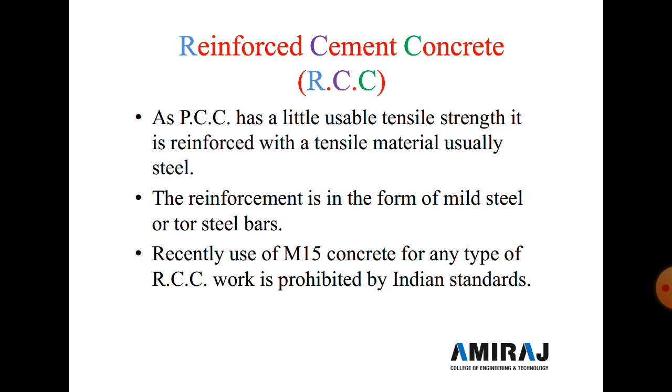Now next we discuss quality control of the concrete. Quality control of the concrete can be considered in three stages. The first stage is quality control before construction, the second stage is quality control during construction, and the third stage is quality control after construction.

So what is quality control before construction? As the name indicates, before construction. This includes quality control over the raw material, over the process and method of preparing the fresh concrete, and transportation of concrete. So here we include the raw material quality before construction. Depending on whether the raw material quality is higher or lower, we prepare the concrete. If the quality of the raw material is higher, at the end the final product concrete is a higher quality concrete.

Now next is quality control during construction. This includes quality control during placing the concrete in the formwork, compacting the concrete and curing of the concrete. So during construction, three stages are there: placing the concrete, compacting the concrete and curing the concrete. If we take care during these three processes, we control the quality of the construction or the quality of the concrete.

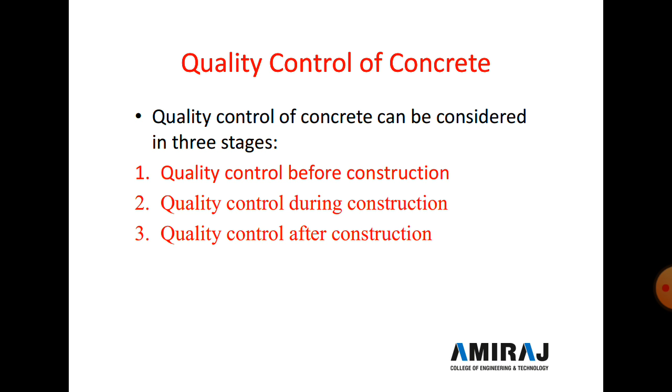Now the next topic is cast in situ concrete. The construction in which concrete is poured in the permanent location of any building structure is called cast in situ construction. As the name indicates, cast in situ construction means your concrete work is done on site, on the construction site. This is the opposite of precast concrete work. In precast, we construct building components in a factory, then transport the precast components from the factory to the site, and we fix the building components. All the components are precast or prefabricated. The opposite is cast in situ construction.

Concrete is made on site, then we pour the concrete in a formwork, then compact the concrete, and then cure the concrete on site. So no transportation work is included in cast in situ construction work. The concreting of any permanent location of an RCC structure is generally done as cast in situ work.

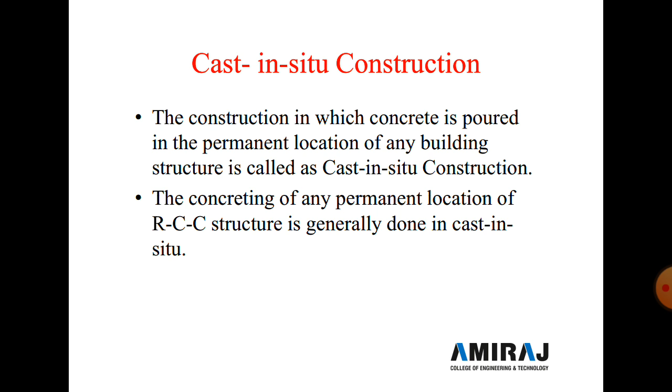Now here the construction procedure of cast in situ construction is given. First is procurement of the ingredients of concrete. The ingredients of concrete to procure are cement, sand and aggregate, and steel bars.

So as per the design, different diameters of bar are used as per the structural design, and then all the material is stored and handled in different locations. Like cement is stored in a moisture-free area. Now next is batching of the ingredients of concrete.

So here there are two types of batching, weight batching and volume batching. If we take a proportion like 1:2:4, here 1 means one part of the cement. If we take batching by volume, one volume of cement, two volumes of sand and four volumes of aggregate. If we take batching by weight, 1 kg of cement, 2 kg of sand and 4 kg of aggregate.

Now all the materials are mixed in a proper way. If the construction building component is small, we use hand mixing. And if a large area of concrete work is done, machine mixing is required. So mixing of the concrete is done. Then after mixing, all the concrete is poured in the formwork. So here placing of the concrete in the formwork is required.

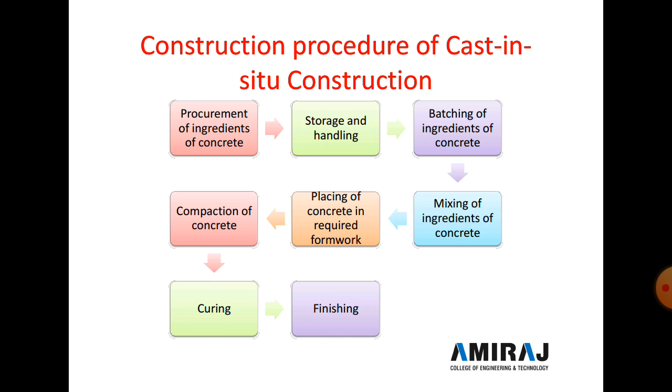Now next is the various operations and equipment for cast in situ construction. There are 8 main operations given. First is batching, second is different types of mixers, third is formwork, fourth is transportation, placing, compaction and finishing of the concrete, fifth is compaction of the concrete, sixth is vibro pressing, seventh is finishing, and eighth and last is curing of the concrete.

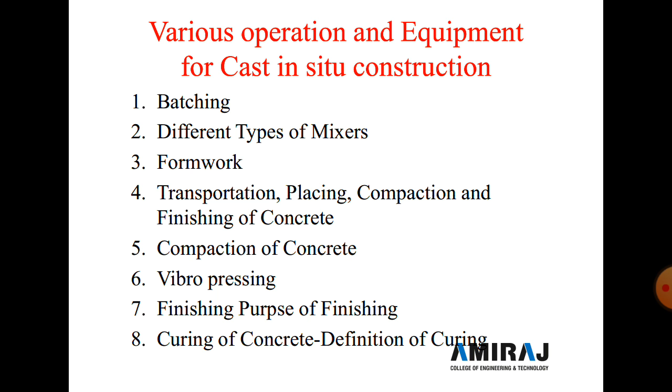So these are the different operations and equipment for cast in situ construction. Now we discuss them one by one. First we take up batching. Batching is nothing but mixing cement, sand and aggregate as per the ratio. As per the ratio or grade, we mix the material by volume or by weight. So batching is divided into two parts, volume batching and weight batching.

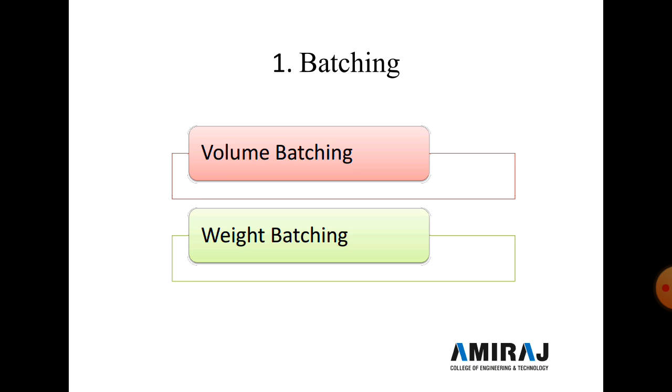So what is weight batching and what is volume batching? Volume batching is not a very accurate method, but because of its convenience on site, it is widely practiced, and on a particular site the volume measuring containers can be calibrated according to weight.

On site, in volume batching, wooden boxes with bamboo handles are generally used, and we also use hand carts in large construction sites. All the boxes are the same size. Raw material arrives on site, we estimate how much weight of sand, cement and coarse aggregate fills the box, and then according to the mix design the number of boxes per batch can be determined.

The box capacities are differently available, like 20, 25, 30, 35, 40, 45 and 50 liters on site. So flexibility can be achieved when mixing different grades and in case the mix design changes. The boxes are called farmas on site. If we take a proportion like 1:2:4, one box of cement, 2 boxes of sand and 4 boxes of aggregate. So here the wooden box is used as a volume measure.

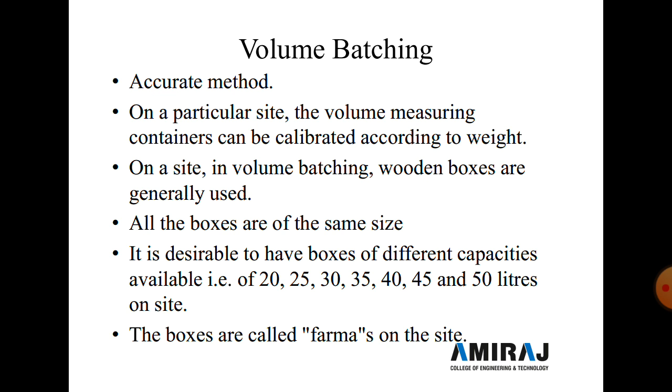Now next type of batching is weight batching. This is an accurate method of batching, but on site it is rarely used or adopted.

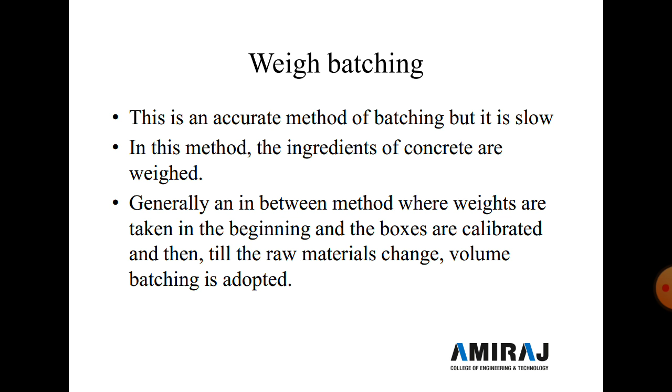Now in this method, ingredients of the concrete are weighed according to the required grade before mixing them. Generally, in between methods, the weights are taken in the beginning and the boxes are calibrated, and then volume batching is adopted till the raw material changes. On arrival of a new material, the boxes should be recalibrated.

So weight batching is used in a modern concrete batch mixer plant, that is, an RMC plant. Generally in an RMC plant we use weight batching. Modern batching plants are very sophisticated, having computerized control batching which measures the ingredients, detects and applies correction for surface moisture and bulkage completely automatically.

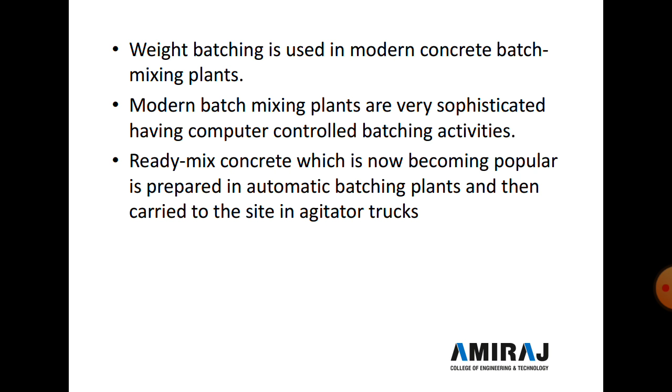And ready mix concrete has now become popular; it is prepared in an automatic batching plant and then carried out to the site in a truck. In an RMC plant different materials are used and also admixture is used. All the materials are mixed as a weight batch.

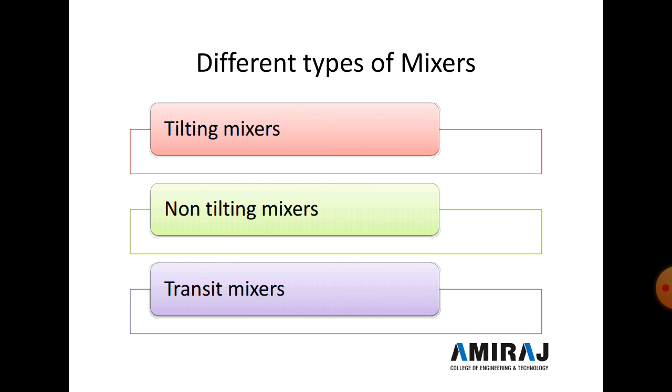Now, different types of mixers are used in construction. Three types of mixers are generally used to mix the materials of concrete: cement, sand and aggregate, and if required we add an admixture. The first is a tilting mixer, the second is a non-tilting mixer, and the third one is a transit mixer. So what is a tilting mixer?

Now the hopper is lowered, water is added to the drum, and the concrete mixture is rotated for 3 to 5 minutes. After this time the drum is tilted to the opposite side for emptying. All the materials mixed for 5 minutes are removed from the drum onto a metal sheet, from where it is carried for pouring into the formwork.

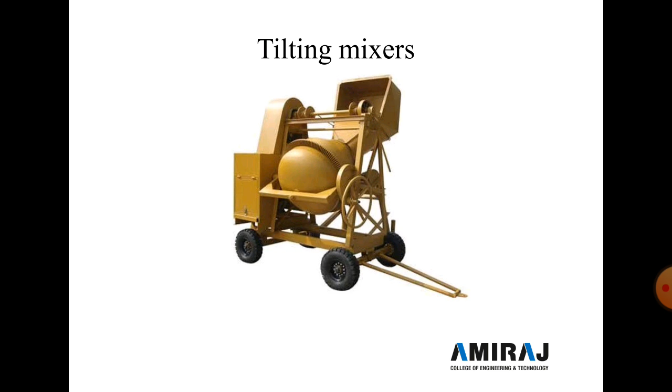Now the second type is the non-tilting mixer, also called a rotary type mixer. These have a cylindrical mixing drum which revolves around a fixed horizontal axis and cannot be tilted. So it's a fixed type. The drum rotates but does not tilt, a water tank is provided on top of the mixer machine, and loading of the ingredients is done by the loading skip, which rests on tires to avoid shock when released back.

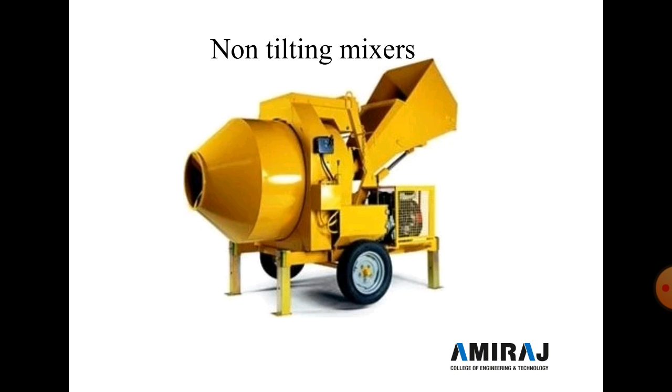Now the skip is raised by the lifting cable and feeds the ingredients into the drum, and for delivery of the fresh concrete there is an opening at the other side of the cylindrical drum. The delivery chute tilts downward, and due to rotation the drum is emptied and the fresh cement concrete is deposited on a metal sheet. So it's a non-tilting type of mixer machine.

Now the third type is the transit mixer. All of you know about the RMC plant. The transit mixer is a very effective and popular equipment used for transporting concrete over long distances, widely used with RMC plants. A transit mixer is simply a truck-mounted mixer machine having a capacity of 4 to 7 cubic meters, and generally we use a 6 cubic meter truck capacity.

Functionally there are two types of transit mixer. In one type, mixed concrete is transported to the site by keeping it agitated all along at a speed of 2 to 6 revolutions per minute. In the other type, the concrete is batched at the plant and mixing is done in the truck mixer during travel, and for longer transportation this gives a better result. This mixer contains a rotating drum.

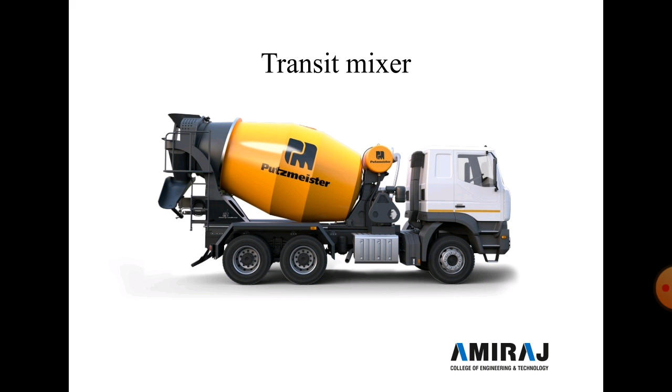Now, in the next lecture we will discuss the next topic, formwork.